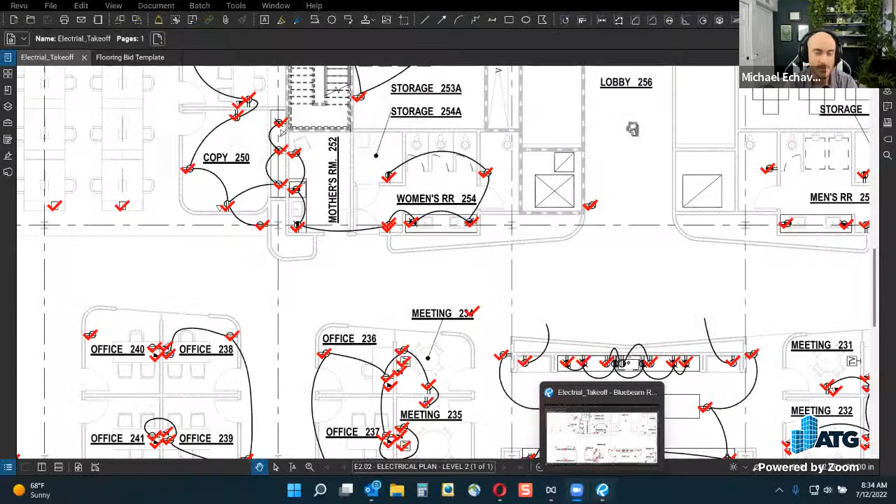We're going to be getting into the markups list and looking at columns, custom columns, and what the heck does that button do, that type of thing. We've done similar things, but I don't know if we've covered this in the same detail. What do you think? I don't know, I'm waiting for you to show me what you have in store, because I forget what I covered last time. I forget what I covered yesterday, so that's nothing new.

In our markups list down at the bottom, we have a number of columns that we can configure, we can change the order of, we can do different things with our status. We can configure these, and there's some confusion that happens where, how come I open up this PDF and my stuff looks like this, but if I open up this other PDF it looks like that? Well, your columns actually follow the PDF and they can follow the profile, there's a little bit of a hierarchy there. Some of these are in a different order when I switch back and forth, some have different names. Why is all of this? Why isn't this consistent every time I open my screen?

Which is funny, because we were just sort of complaining about that. I was complaining that when I open up Zoom, all my windows, attendees, and Q&A panels aren't in the same place every time. So we're tying the room back together here.

So with that, let's take a look at what I've got here. I was sort of looking for a better data set to use this with, but usually it's more fun to do something in the takeoff or quantity markup realm, where you can start adding some custom columns. But in this data set, I've got an electrical plan, I guess.

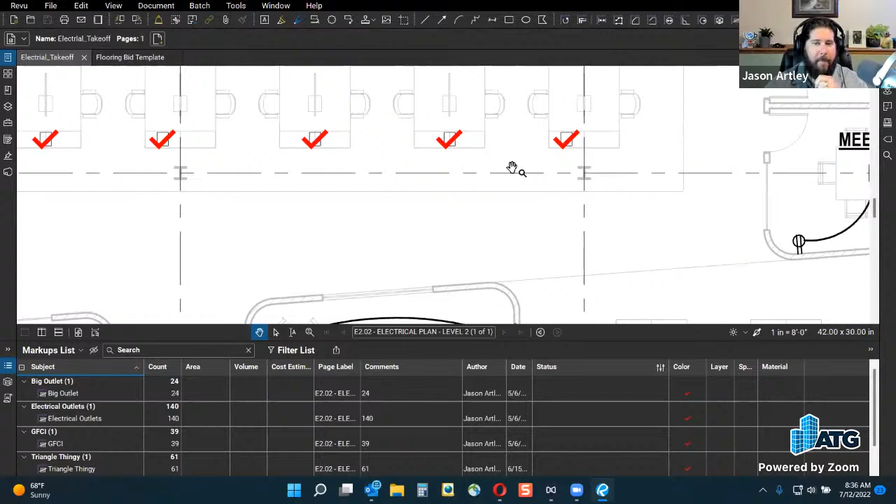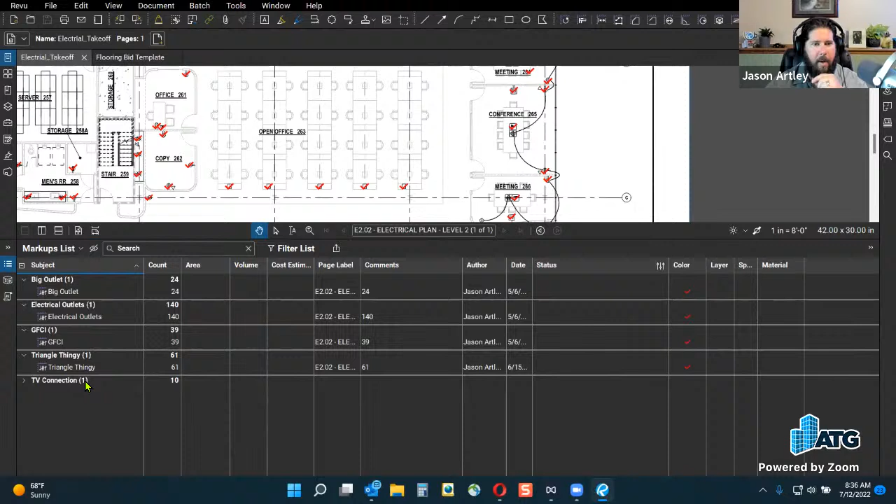I'm not an electrical specialist here, but I ran a visual search for some of these symbols. Here I've got my TV cameras, or TV, I'm guessing, not just a camera. I did a visual search for TVs, and I applied a count measurement to them. Then we see them down here in the markups list. So here I've got 10 TV connections.

So if you haven't seen a visual search, let's run that real quick. I think there's probably something else I can search for in here. I don't think I got it all. Should we try that little triangle thing for these guys? Let's run it.

The only issue with running some of those is the lines, but yeah. Oh, look, there's a TV it didn't find. That's weird. How do you resume the count if you don't find it? Do the data connection. Ooh, like I know what that means.

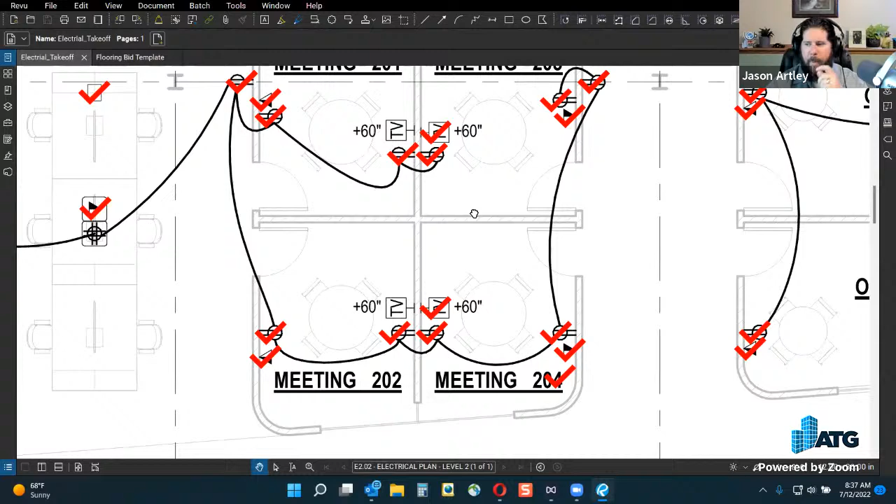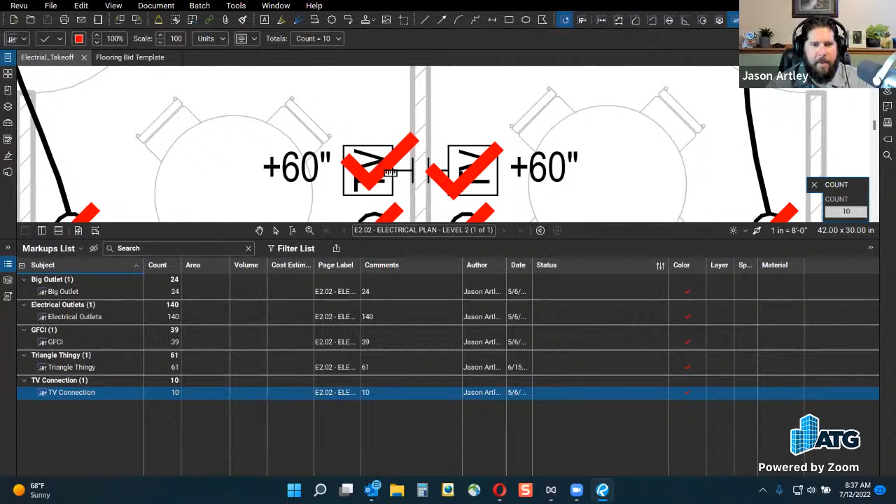Resume the count — got to go down here and then a right click. No. Resume count, now I can go back to my resume count tool. Go find those things again. There's that one. How come it didn't change to 11 yet, though? No. Weird. There you go. But now I can't.

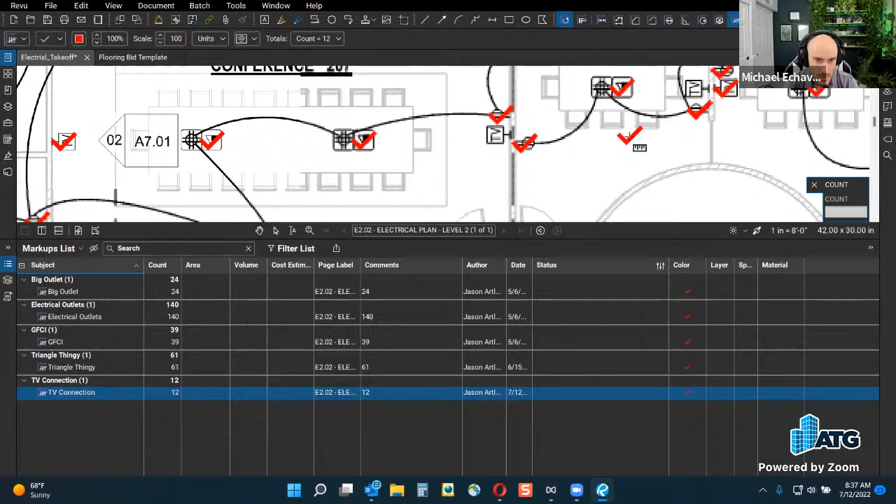Oh, it's a stupid mouse, not Revu. Yeah, you see, you do it one of two ways. You can go from the markups list. I'm assuming the markups list is probably where Jason went, just because they're all the same checks, but different subjects for each check. So resuming a count from an existing one, you just have to make sure you're over the right one before you resume it from a different segment.

Exactly. So in my visual search, it didn't get all of the TVs, it just got most of them. So I did a resume count by right clicking. There are a couple of different ways to do it. And then my mouse periodically loses the ability to scroll — I have to turn it on and off again. So then I got confused, but I think I got them all now.

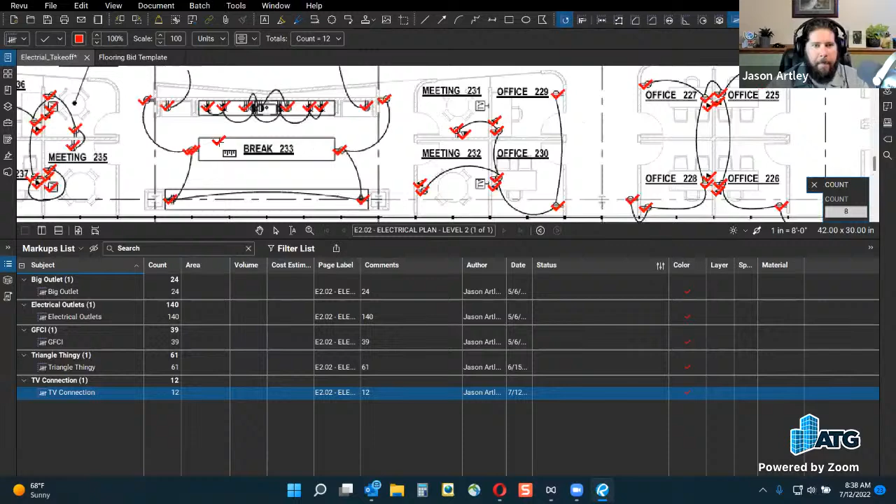Oh, it's like Where's Waldo this morning. And I won't be super accurate at this, but I'll hit enter. Whoa, I never stopped my thing. Why did it give me two different counts? Weird.

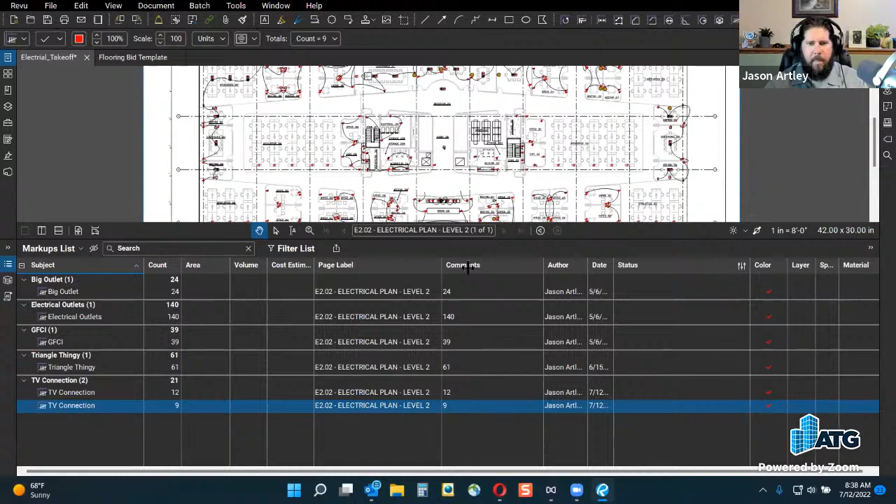So let me know when you want me to field you some questions, Mr. Artley. Never, I'm scared. So here's one — Chris wants to know how you remove one.

That's a fine question. And David's question is even better, because that's what I was trying to figure out. So how do we remove a count? Let me back up. When I did visual search, I went in here. Oh, come here, camera.

Got a rectangle, went around something, and I don't have much that's open. I know this isn't going to work very well, but we'll try it anyway. This is going to be really tough. But you go for a symbol, and then you search. Don't use the current document — search for current page, it'll save you some time.

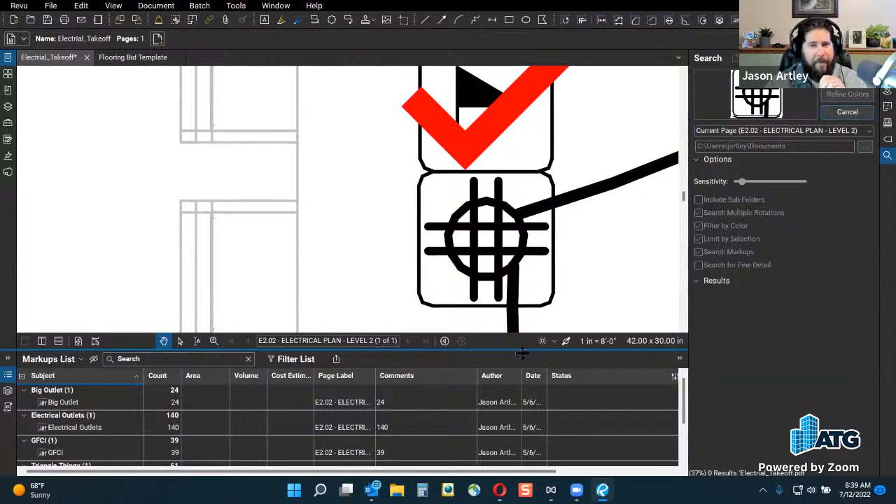But if I search, this might not work out well because of these lines coming off. It's looking for an exact match, and I didn't do a good job grabbing those. So I found 14 of them.

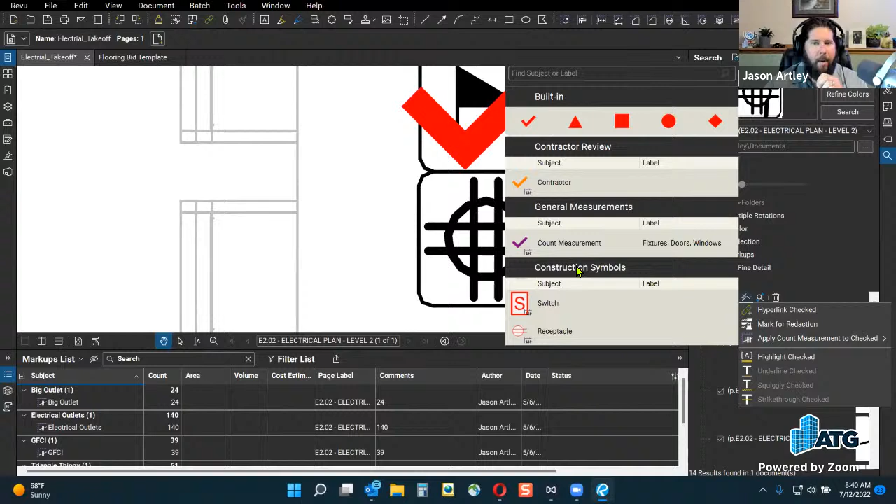So here I can go through and verify them. But if I go up to the top, I can select them all. And then if I pull this down, I have the ability to apply a count measurement. So here I can go in here and grab a check mark, right? Or if I would have done my symbols a little better or customized my markup tool chest, all these would show up here. But I can just apply a check mark, put it on that quad.

Thank you, Sheldon, I totally know what that is — it's a quad outlet thingy, a four banger is what I would call it. So it went and found those. Cool, well, maybe it made a liar out of me.

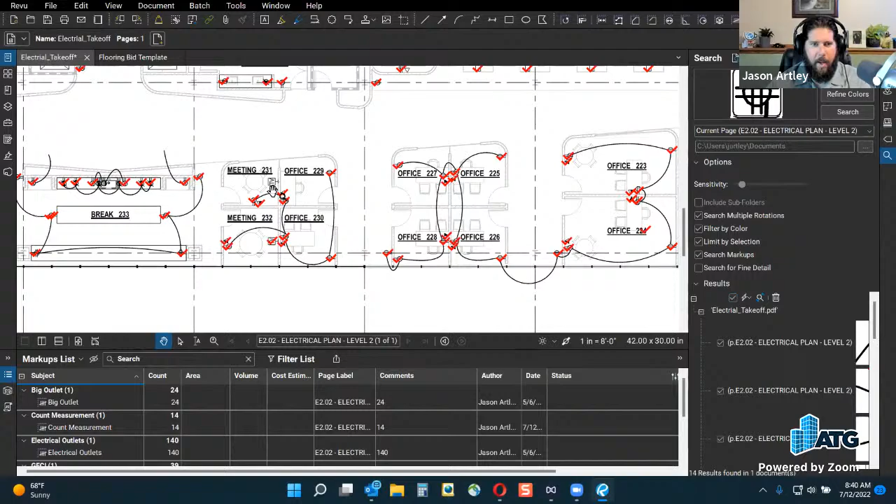Did it get this one over here? No, it did not. But I can dismiss it. It found a handful of them. And down here in my markups list, it's going to say it's a count measurement, right? I didn't tell it that it was a quad. I'm going to do that now because I'm going to just wipe this out and call that a quad outlet. That's what it's going to be. So I have electrical outlets.

I have quad outlets. So couple questions. Is it possible to merge counts? This is what I wanted to do. I did a resume count because I had run the visual search. It didn't find all of them. I right-clicked on the thing down at the bottom.

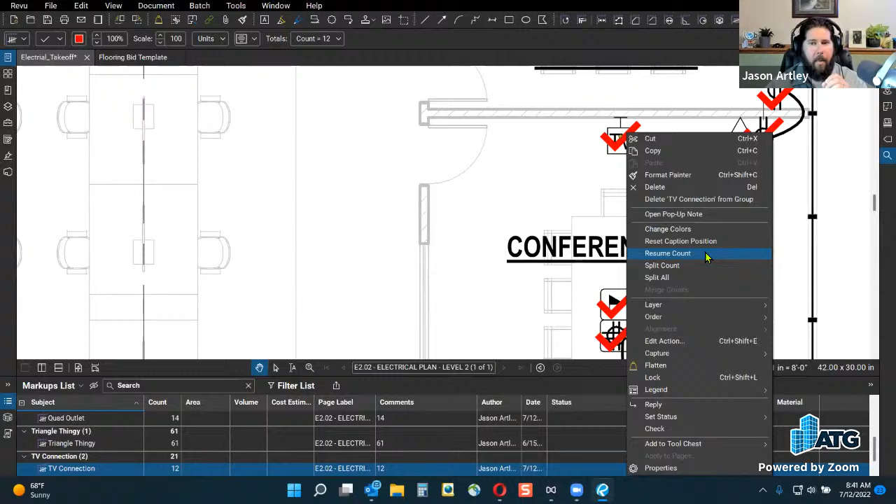I could have right-clicked here on the check mark and done resume count right here. When I did that resume count for my TVs, it actually gave me 2 down here. And I don't fully understand why it gave me 2 different ones. They are merged here because they're included in the totals, but I can't get these together, right? There's no way to.

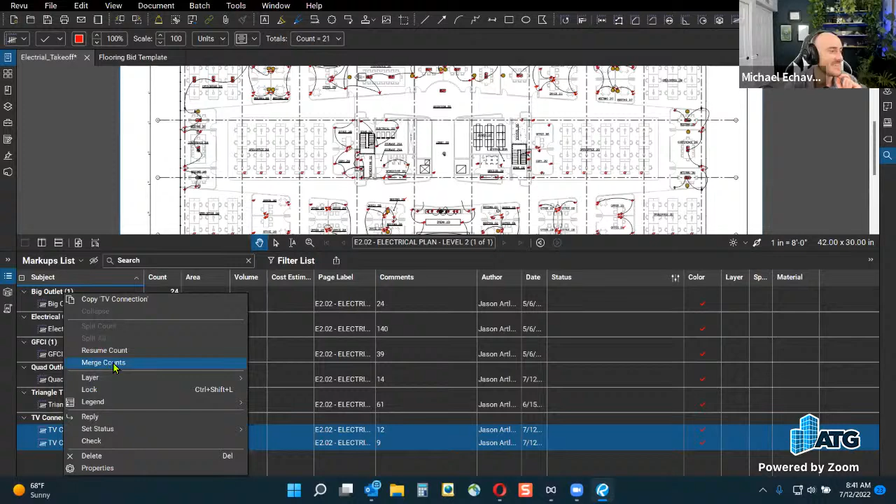There is a way. Yeah. There is a way. Look at that. I was waiting for you to ask. No, David asked that question. And I was like, I wasn't sure. I was waiting for you to ask me how you do it. I thought I'd seen it somewhere, but when in doubt, just start right-clicking on stuff.

So yeah, you can resume counts, you can remove counts. Someone asked a question about using different symbols. It's completely up to you. Just be aware you'll confuse yourself if you don't use a different symbol visually, but your data will all live down in the markups list either way. So if you aren't using a different symbol visually, you may be confused because they all look the same and you don't know what you're counting. In terms of the itemized list below, that's why you have different symbols for different items. Heck, you can even go through and take a symbol, snapshot it, change the color, and then use that as your count if you wanted to, and create it into a count. But yes, you can merge, you can resume, you can remove.

Counts can be per document or per page too. And I thought, didn't we do a whole episode about this? Or we've teased about it a bunch of times, but that merge counts thing, I don't know if I just learned that or if I forgot about it or what, but I'm glad that it worked out for the right click. And I'm glad that somebody hadn't seen that before. So there we go. That's what we're here for. Let's get under the hood and start messing around and learn together. That is all fun. That's why we do what we do.

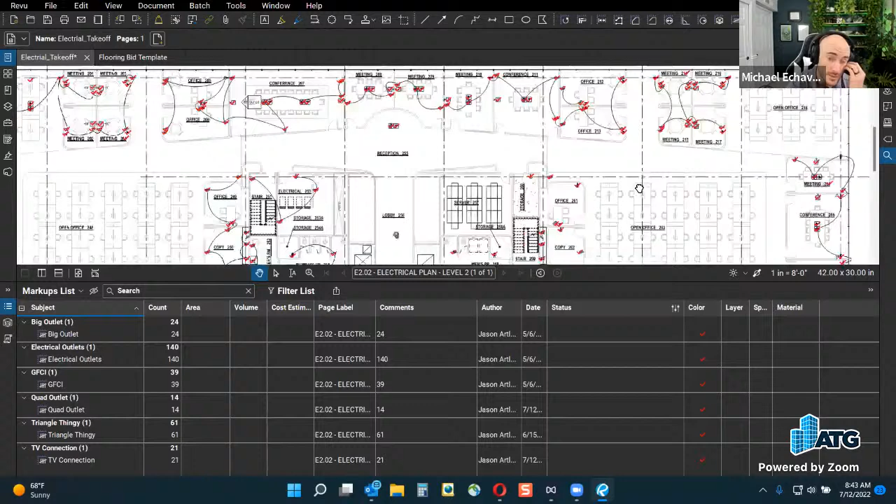All right, so you can get count per spaces. So depending on how you want to itemize your information, you'll create spaces. I forget who did the overall, but I like to do it where you have an overall space because you can have spaces within a space. And this isn't like the movie Inception, but you can have a space, which is your header space, so that you can say what page it's on or what level of the building, right?

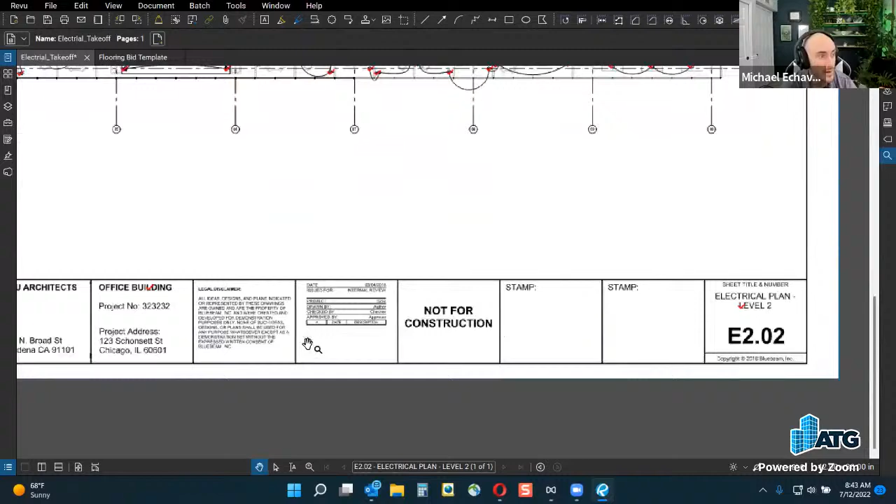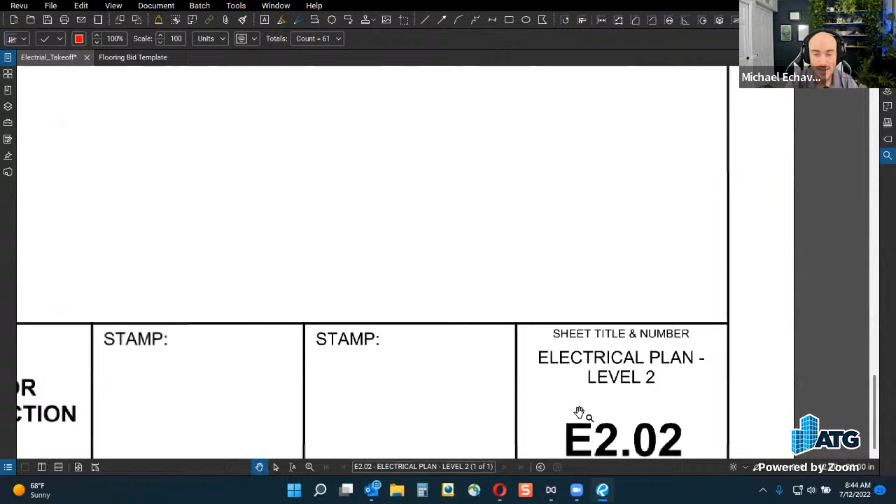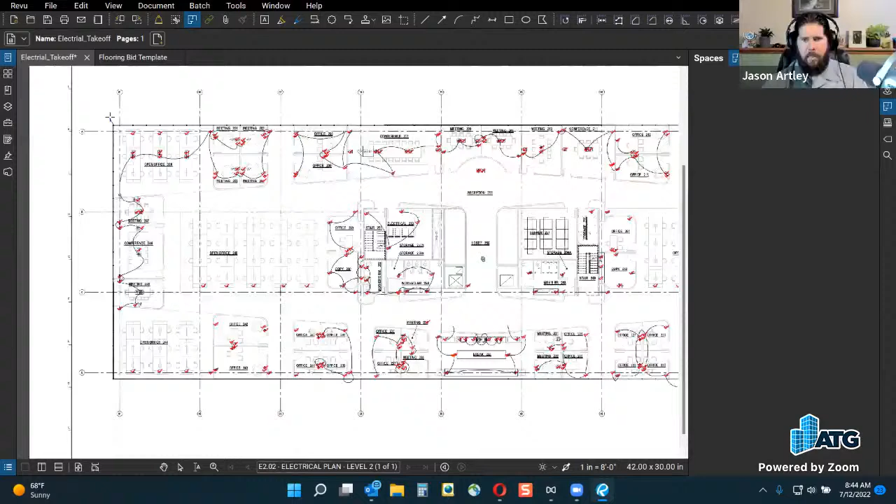Sorry, I just hit my screen. Going through and having a space within a space, because then you have like the level, and then from there you can have the room that it's residing into. All right, oh, I messed that up. I like rectangles, I know. I was trying to get a nice clean rectangle here. So there's my level 2 space. And then Inception, so when another space falls within another space, it picks up that hierarchy of a child space.

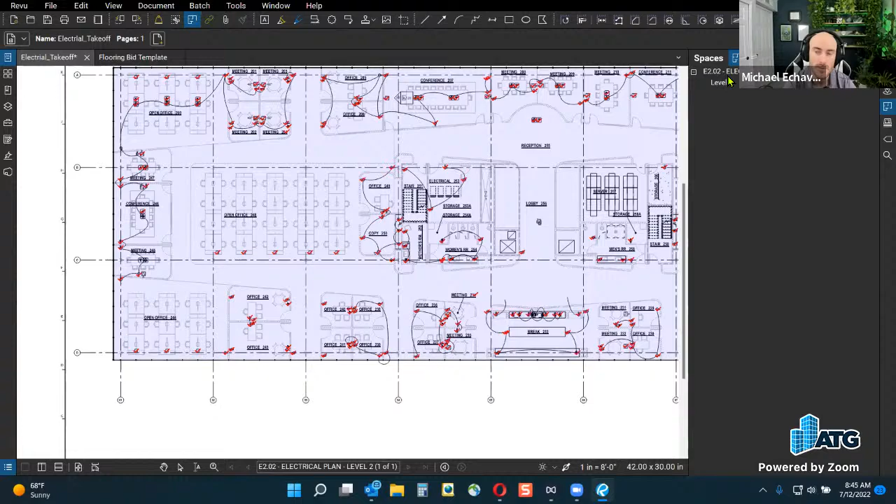So Jason, go and put in the space, man. I'm trying to find an easy one. This room's crazy. If only I had followed your advice on LinkedIn about using dynamic fill to create spaces. Oh boy, thank you, sir.

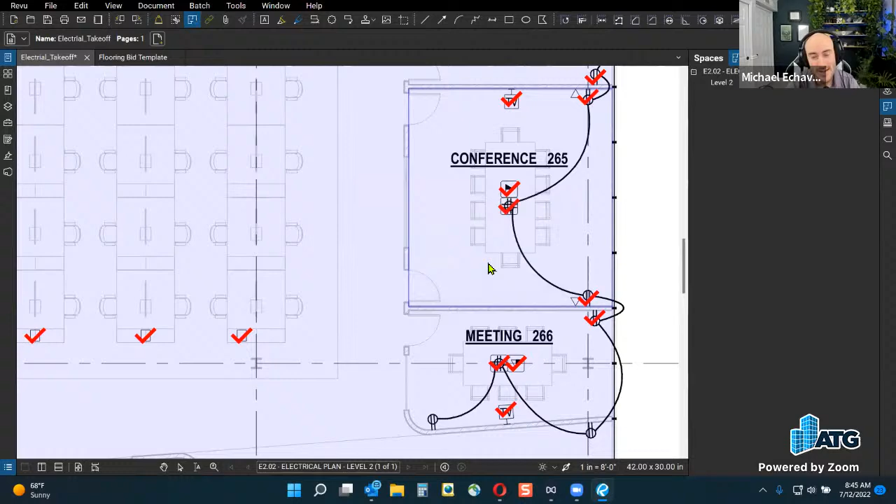So here it is, see, yeah, he has level 2. So it'll say level 2 in the space, and then conference 265. Man, it's early.

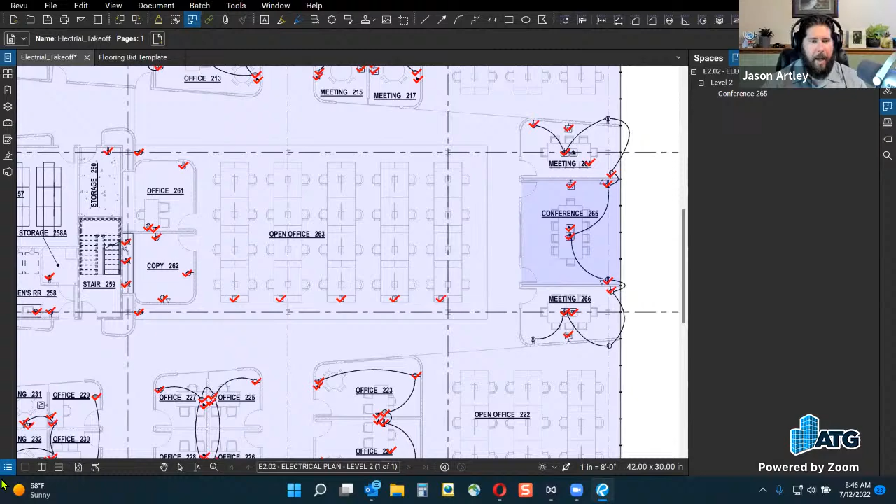Start chugging that coffee. Up here we just see the name of the PDF, so the PDF doesn't always tell you that it's electrical plan level 2. We put a space within a space to tie everything together, because now in the markups list you're going to see a space. Or are you?

Count area. Oh my God, did we just fall back on track? We did, there it is. So here is our space.

Well, I want this over here. Ta-da. How'd you do that though? You just drag, like magic. You click and drag, you take what you want, you put it where you want. It's okay, I don't remember what I did, I just did things.

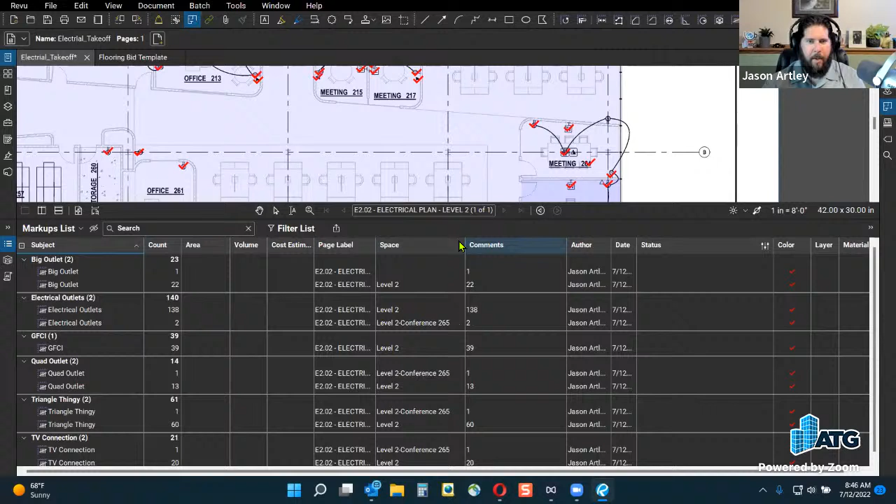Left click and drag, seen that little tiny white triangle right there? Oh there it is, oh it's back over here now. That will drag it to where you want it to go. So if I want to put this over here, follow the little white triangle, and ta-da, it will show before that one.

And then show them if organized from the space too, so it sorts it. I like the breakout there, because then you can see - except for those people in estimating, it's probably going to be magical for you.

I'm thinking more in terms of a punch list. I'm going out to the field to itemize things that need to be addressed, and this can tell me, right? So level 2, conference 265, I have 4 issues - he has 4 counts in there. But you could do this for an itemized list of going through a cost estimating.

Well, what is in that room, right? So now I have triangle thingy, quad outlet, TV connection, and electrical outlets that need to be assigned and purchased for that specific room.

Does that answer your question, David? If you put it in left position, does it sort by space as the first item? Yep, it sure does.

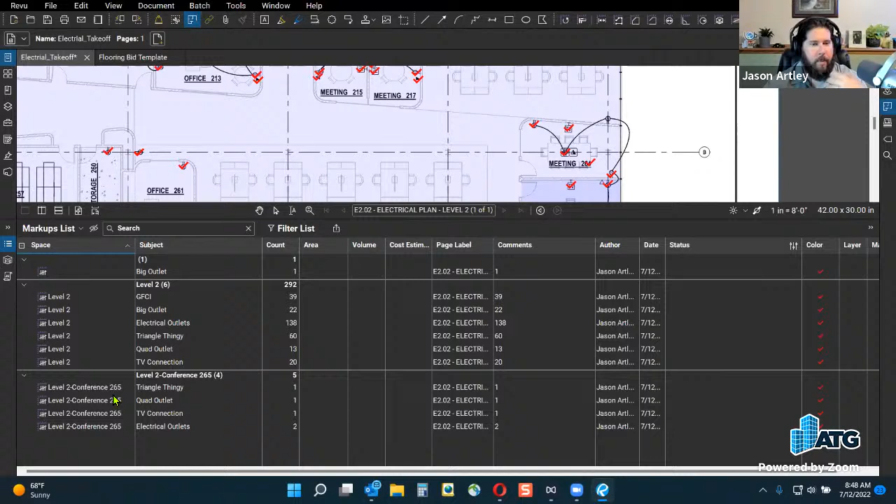This adds a ton of detail and it didn't take that much time to do your spaces. They're so incredibly powerful, because if we were doing a punch list, or having to go fix something, or just hammering down our counts, I know exactly where this is, and being able to get in there and see where these items are, where it is that I need to focus my attention.

And that's just half the things you can do with spaces, right? We can create our snapshots, we can create our areas, we can create details. There's a ton. So always a good time.

Let me go back to the chat. Doug's saying layers with spaces is great - I couldn't agree more, grouping makes a ton of sense.

New find - David had a new find of the good old delete from the group, the single one. The only thing with the single group, just make sure when you're in the group, because you can select from the group. If you select the group, you can pick a new node.

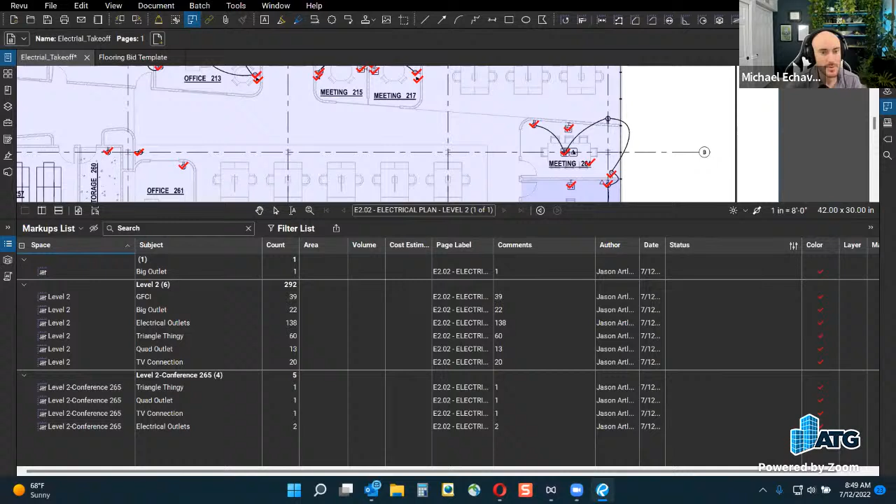So if you go to a count group, Jason, can you go and select a count group - a grouping of counts on the PDF. So just select one of the items in the group.

So you'll see this - hold on, can you move your markups list down so you can see a couple of them? So it grabs all the nodes of that sequence of groups. So grab that thing to the right, because that has 2 right next to each other. And then are those different? There it is, okay, so you can see it down here.

So you see the green node and the yellow node on those markups - that's in the same sequence of groups. So down below on the opposite side, there's a green node. Right where your mouse is, move it up a little bit to the left. I see no green, am I losing my mind?

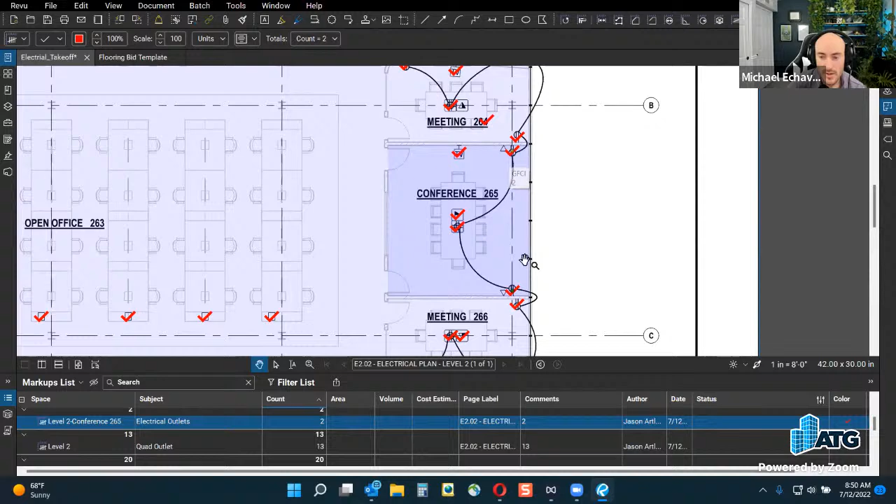Hang on, coffee infusion. So right here, this is green, that's yellow. Oh wow, yeah, whichever one you've selected is going to be deleted. So if there's like 10 here, you'll have 9 green nodes and 1 yellow one, and you can just switch between the 2 - which one is supposed to be deleted - by clicking the node. Does that make sense?

Weird, never seen that before. Yeah, the node is the important one. Just click through which one you meant to have deleted. And then when you right click... sorry, I'm no longer controlling. That was weird, I was trying to get out of your screen.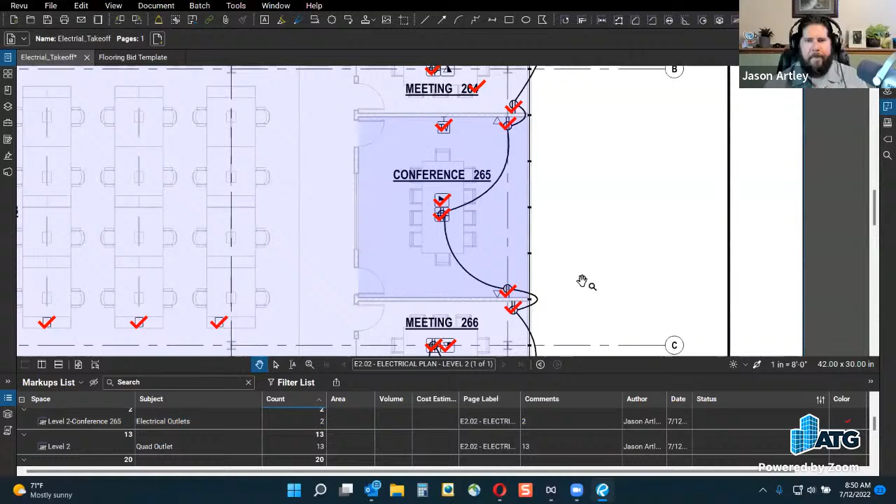Weird, so yeah, my eyes must be failing me. I didn't even see those things. Terrible. What do I need to get for an eye exam on a smaller screen? I just had an eye exam not too long ago.

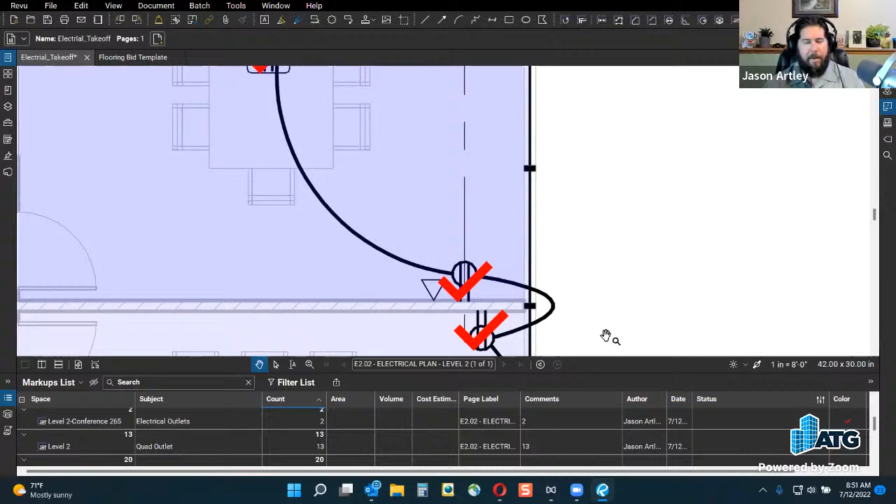All right, let's get back. Can you export the list to Excel? Of course you can. Go to AU or go to XCon, and Doug's going to talk all about that, where you can use your exports, take your summary, kick it over to an XML or a CSV, which opens up in Excel, and then you can do all sorts of things. I highly recommend attending Doug's show for estimating.

Yep, that's the Doug show. Isn't that going to be streamed too? Is there an XCon Anywhere stream part? I don't remember.

There was a question from Ed. Is there a way to, if someone sends them an updated PDF set, yes, you can export. So the question is, can you export markups from one PDF to the next? Yes, you can.

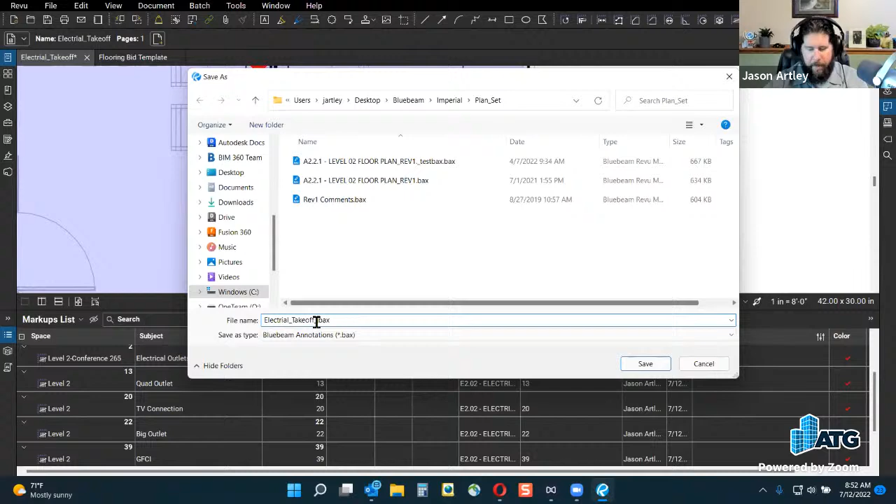So if I export all these markups, this might not be a good example because I don't know if I have a blank version of this, but it's going to export as a BAX file. So I can say, here's my electrical takeoff. If I were smart about it, I would do a date. Now those are exported. Now if I go open up a different file, I think this one can be found somewhere in my Bluebeam plan set.

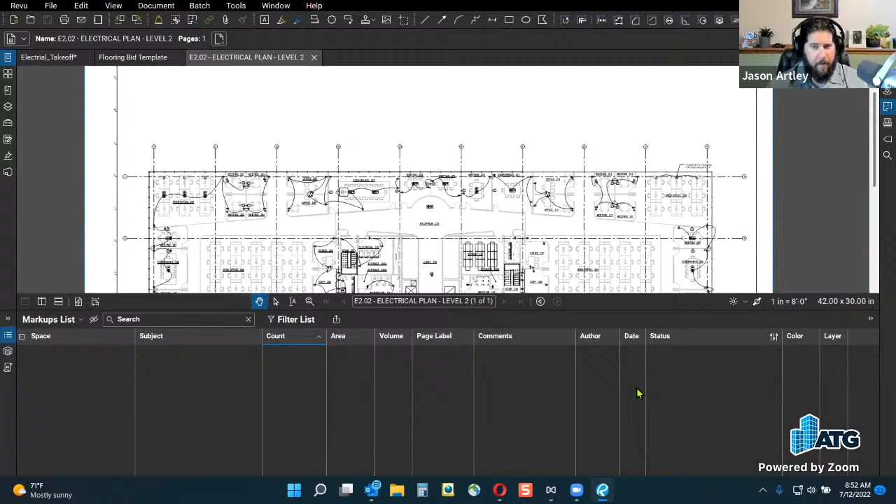Oh, electrical plan? Maybe. Look at that. So here's the raw version of that same file, right? If we go to the markups list, there's nothing there. Notice my columns though, this is what I wanted to show, how they change between the drawings. So these are even different, technically the same file, different names, but the columns are way different. But there's nothing in here.

Now I can go to markups list, markups, import, go find that BAX file. BAX file, that was electrical. What, date modified? Did I not put it in there? Not on desktop, you're on C drive. There you go. Was it on my desktop? Oh, I don't know, I'm confused.

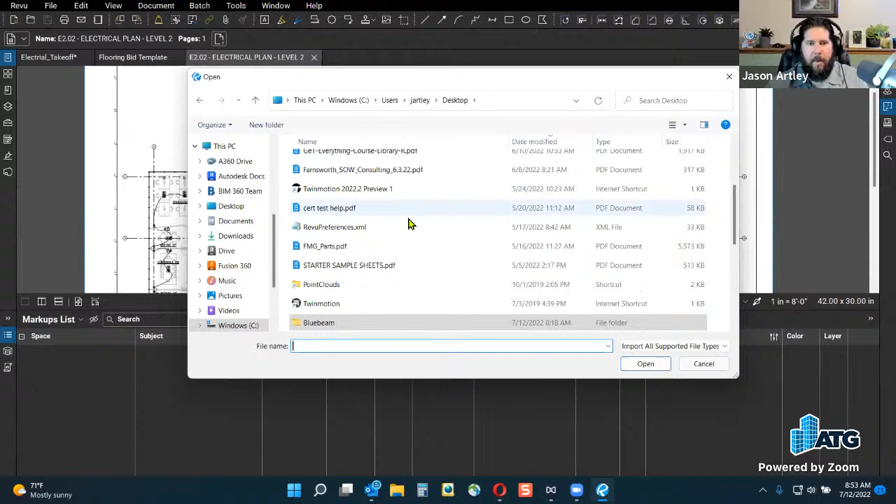It says C drive, but you click desktop. Oh, come on now. It doesn't take long, we'll hit export. I was going to plan set, that's where it was. So, and it doesn't need to be a BAX file either.

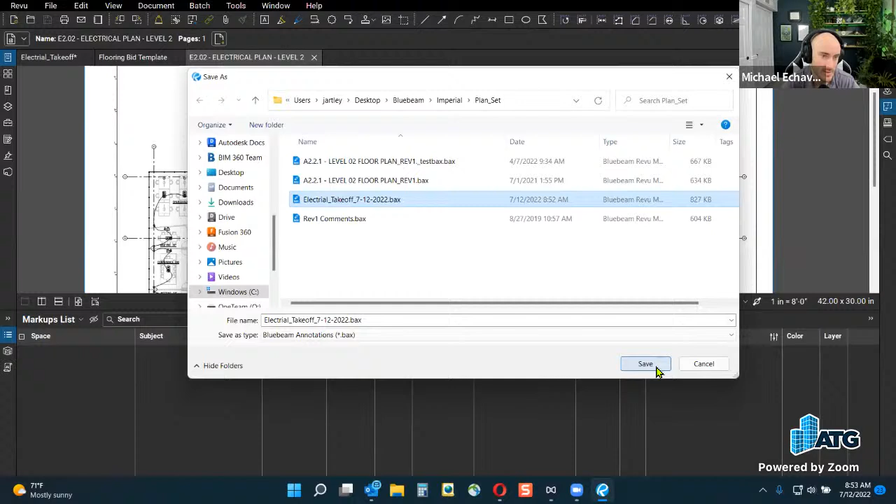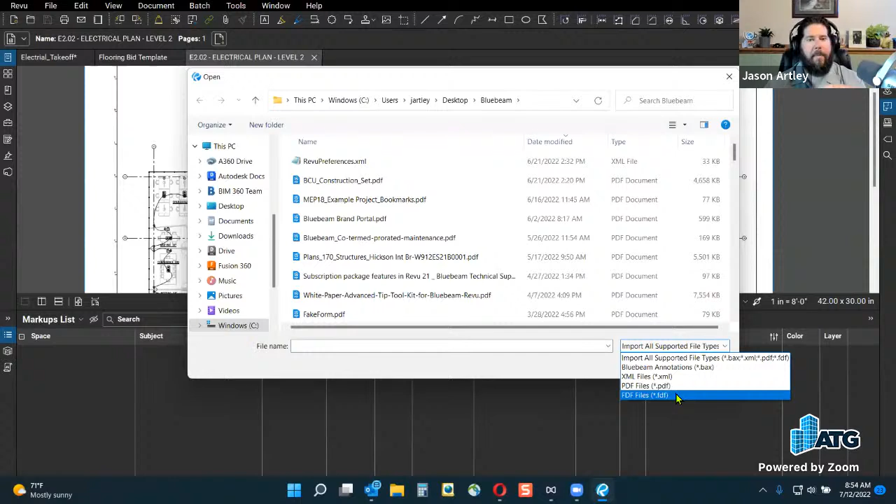For those folks that are looking, you can have either or. This is specifically exporting the markups. You can bring it in from an old PDF set to the next too. Correct, so let's highlight that a little bit more. When you go export your markups, they can be an FDF or a BAX, but when you import your markups, it will allow you to do a PDF, an XML, a BAX, or an FDF. So you could just grab a whole PDF and it will bring in all of those markups. So be careful with that.

FDF, isn't that forms data format? Something like that? Sounds convincing, I don't know. You hit the nail on the head there, maybe? So someone want to Google that real quick? I will, yeah, was that a hint, nod?

So yeah, let me jump over here to my electrical takeoff BAX file that I just exported. Now what's going to happen when I do this? Forms data format, this is where we need like a poll.

It was forms data format? Yeah, look at that. Is that what you guessed? Yeah, I did it. High five, I'm late on that one. I didn't leave you hanging though. But yeah, there we go, so that's your forms data.

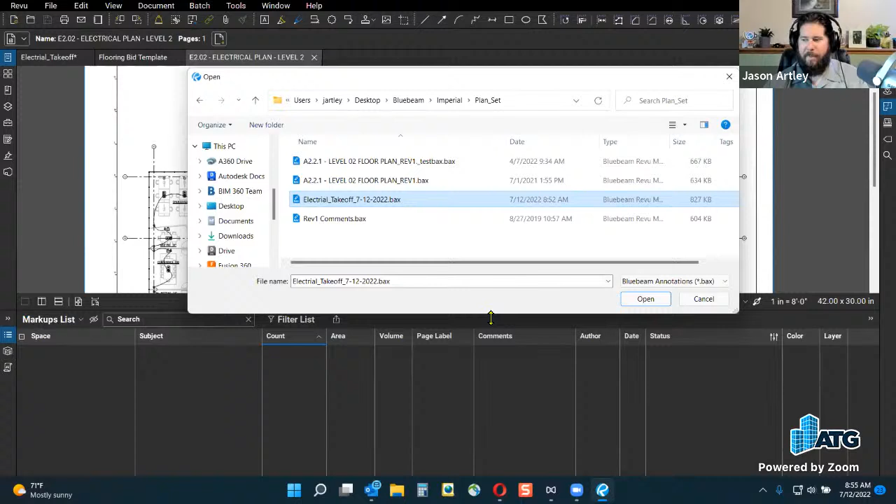So here's the question, what's going to happen to my columns when I import this? Will it bring over the custom columns from that other one, or will it just bring in the count data? Anybody? There's a hand raised. I think Chris just wanted in on the high five. Oh okay, that's what I'm assuming it is. Will it? Oh, inquiring minds want to know.

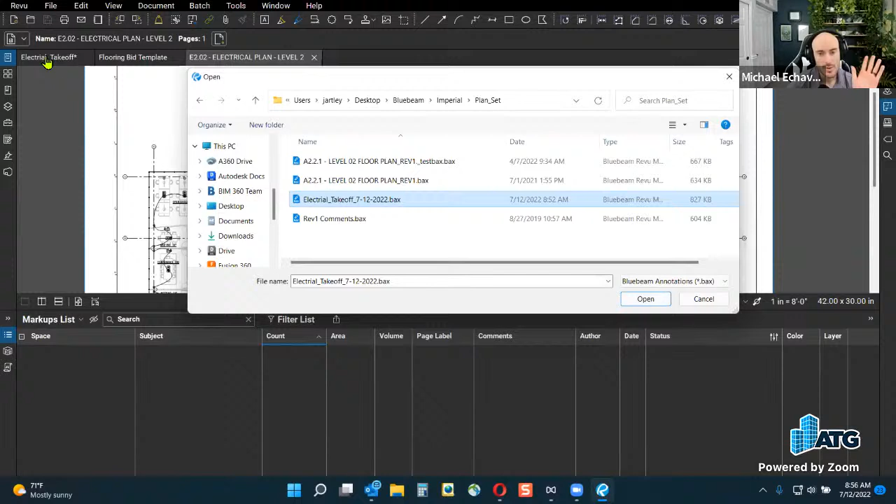Here we go, so subject, count, area, volume, page label. There's nothing in here that's custom. And you're not changing the profile either, right? Nope, all I'm going to do is import the markups from my electrical takeoff drawing. But hold on, what's the difference from doing this versus the standard PDF? So we should rerun it back with exporting and importing from a PDF.

I don't know what the difference would be. Do you know the difference? No, that's why I'm asking. Okay, well that's what we're here to do, boys and girls. This is what we love to do. So let's find out. I'm going to hit open. Watch the columns - they didn't change.

But what about bringing it in from the PDF? Hold on. Yeah, there's no custom columns that came with it. Spaces didn't even come with it. Because custom columns are saved to the PDF or the profile. Correct. So what?

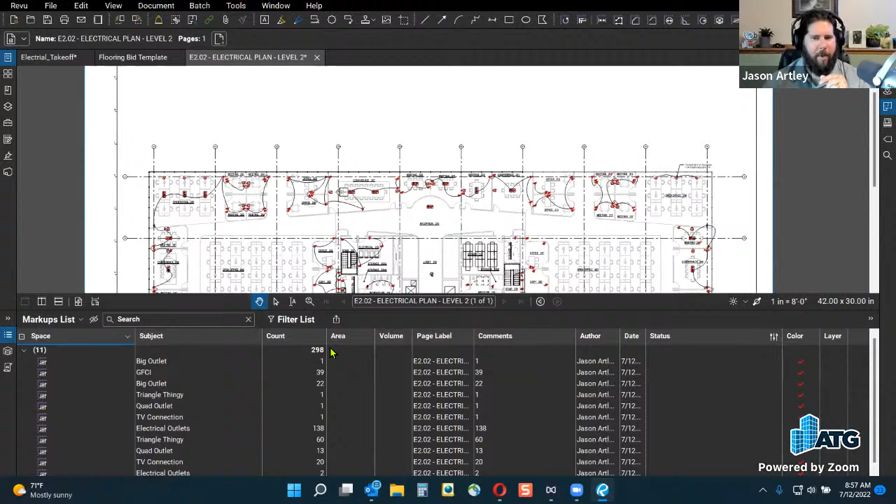So what if you bring it in as a PDF? Yeah, I'm thinking this might be the better workflow because look at this - it's kind of a mess. Nothing is organized the way I like it. I mean, you can do some stuff, but it didn't give me all of the information that I was after.

No custom columns. Okay, let's do the same process where you close this electrical level there. We undid it. I'm going to go back to this one. I'm going to save it. See your desktop? Yeah, we always tell it can be saved because you're missing the asterisk there. Did you save it to your desktop though, or did you overwrite it? I overwrote it. That's fine.

It had problems anyway. Oh man. Well, I'll start over. I ain't scared. All right, but where did I put it is the better question.

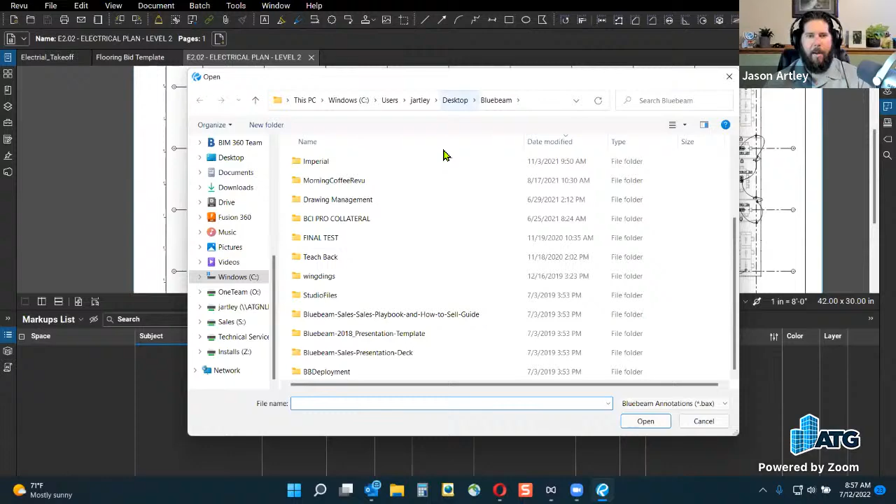Imperial plan set. Oh crap. Uh-oh. What do we do when we don't know where our file is? We come up to the top, we right click. We don't have to hover over that, but we can copy that path. Or we can export that document folder and it will open up, ta-da, right there.

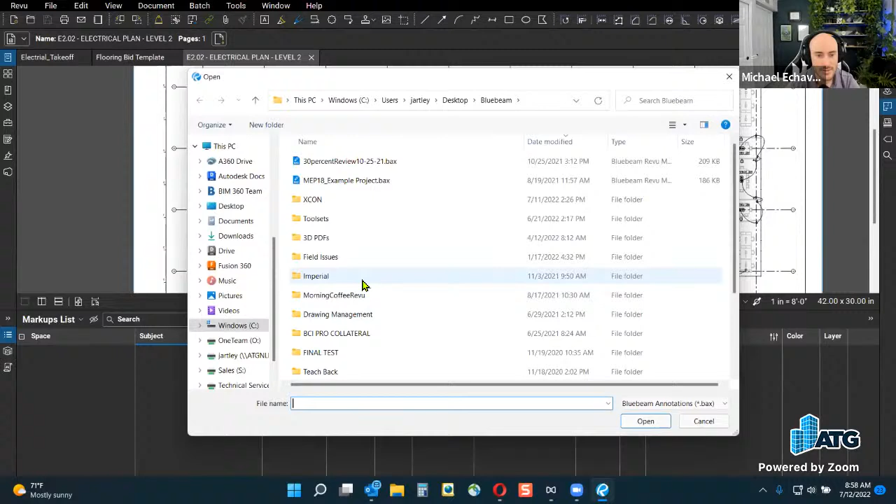So we'll jump back over here. I want to import that entire PDF's markups over here. So we'll go import. Remember where that was? I did until you questioned me. It's looking for a BAX. I'm going to say it's a PDF, and we're going to find it under plan set, electrical takeoff right here.

Save this morning. Now, same thing, same exercise. Watch this, and we'll hit open. Watch what happens to the markups list. Nothing.

Did you have custom columns in that first one? I sure did. Now, it didn't have data tied to it, though. Right? What if it did? What if it did? How would we even do that? So let's dive back in.

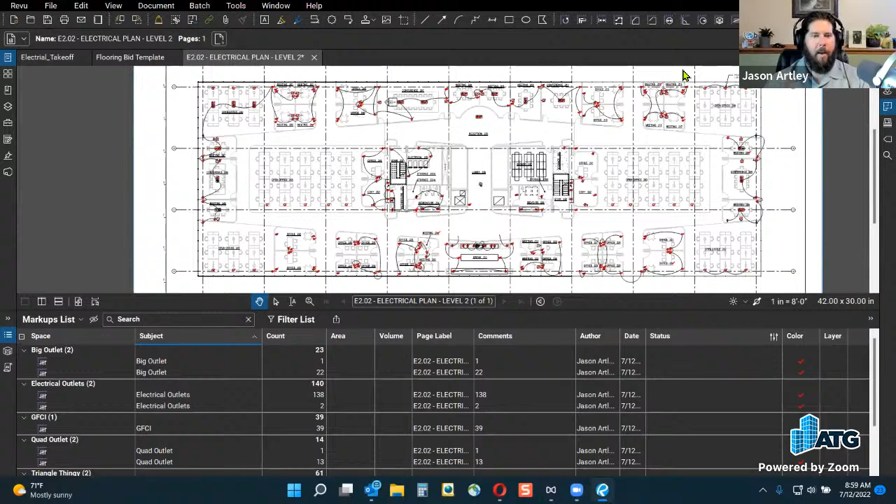Hit undo, back though, because I want to see if it does it. Okay. So let's go back, rewind. Our custom columns, so the cost estimate one that I have here, did not come with these markups. But at the same time, this custom column didn't have data in it. So what we're going to do is add data to this column, which gets us back on track.

If you go to markups list and go to columns, there's a number of columns that may or may not be checked depending on which profile you are in, as well as what PDF you are on. Cost estimate is one that you don't have - that is a custom one. And once it's created a custom, then you can see the check marks. But let's see, page index, we don't care. Lock, we don't care. Check mark, yeah, these are all fine. Length measurement.

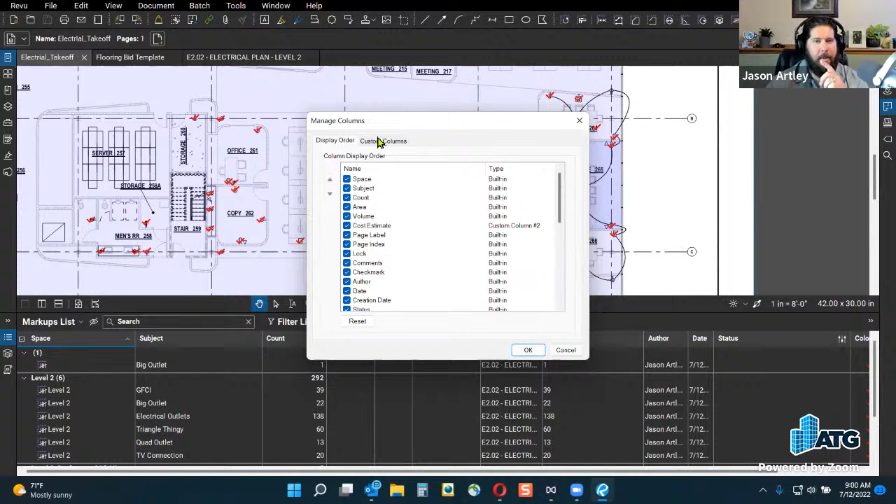Let's go to manage columns. If you go all the way down to the bottom, you'll have your manage columns, and then there's custom columns. You will not see this if you're in a studio session. But in here, I have my custom columns, and I've created one for material, and I've created one for cost estimate. I don't remember what this was, so I'm going to go to modify. Oh, I did area times material. That's not what I want - I want count times material.

Currency, yeah, and the great decimal. The thing about these columns or formulas is that they suggest things, so your variables are existing. Right, makes it easier for you.

Oh, these are... I don't want these. Let's just start over. Material. This really shouldn't be material. It should be object or subject. Symbol, or what's a better name for this?

If I wanted to make one for GFCI and big outlet and electrical, the outlets, electrical fixtures, fittings, electrical utilities... I'm going to go electrical fixtures. Okay, so I'm just going to do a couple of these.

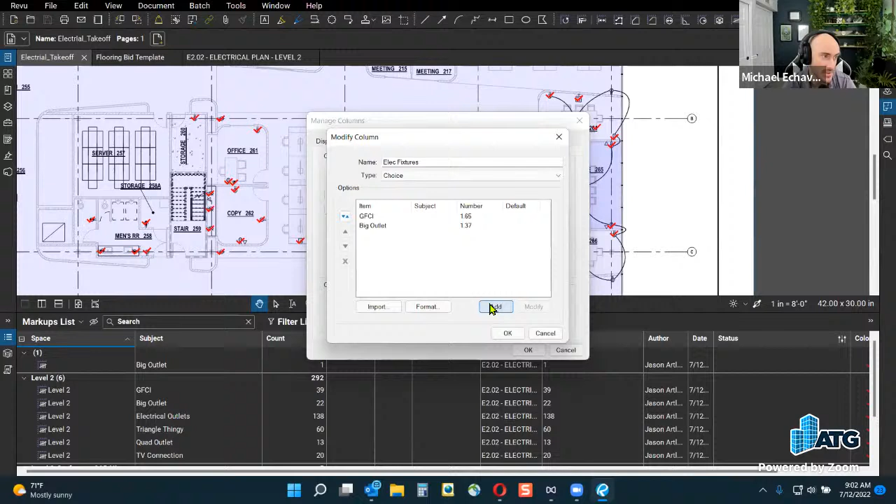And I'm going to say these are $1.65 a piece, randomly guessing. So what you're saying is if the subject is there, I will only have the choice for whatever that subject is. Correct. Can you have multiple subject names in the subject? Because if you want to have multiple choices for multiple subjects, could you do that? I don't know, can you? No, tried that, doesn't work.

Cool, yeah, quad outlet. Yeah, comma... oh, yeah, it's not going to work. But good idea. TV connections. Oh, those are got to be 268. And I'll do one more, just make it quick. Quad.

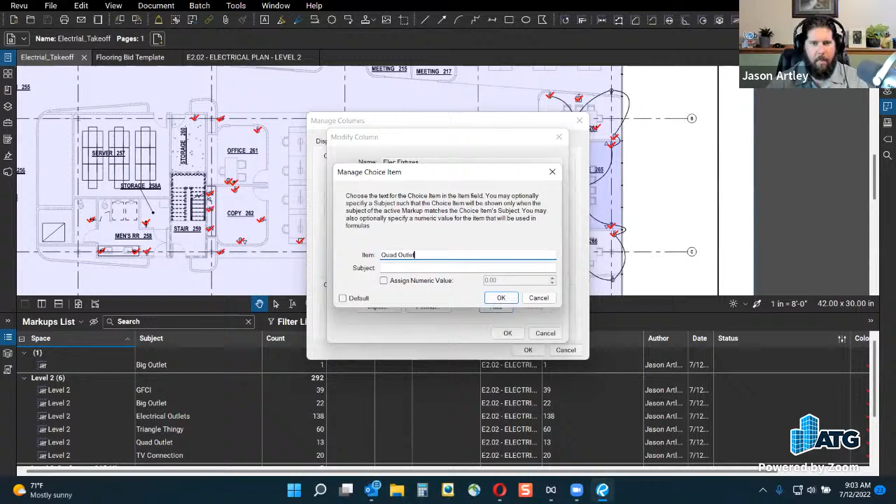These are 3.59 on sale at Menards. All right, so I've added a dollar figure to these, and I've called it electrical fixtures. This still won't work because my cost estimate needs to go back. It's not looking for material, count times electrical fixtures. See, that variable that I just created is now selectable.

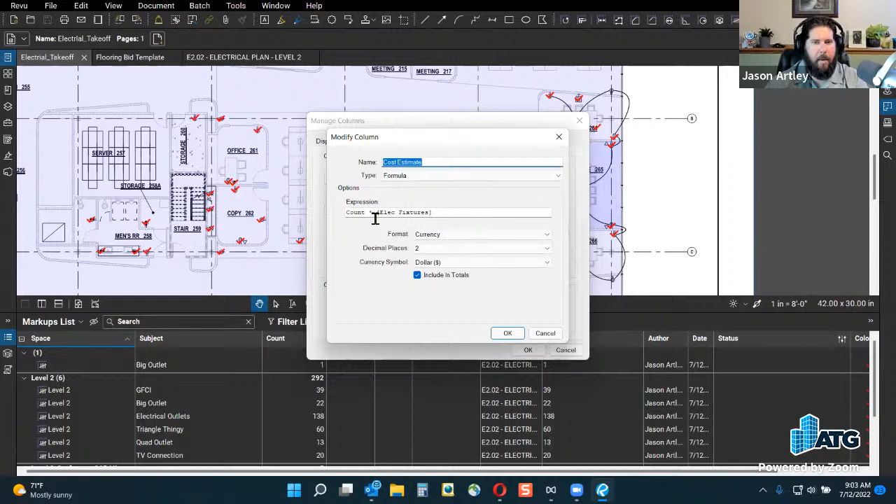So now it will say, oh look, I found 39 GFCIs, and the GFCI has a known cost, right? Because we have it in here of 1.65, and it's going to multiply them for me based upon my asterisk there, right? So we'll hit OK.

And nothing happened. Why? Why did nothing happen there? The cost estimate should have taken in this count. Was it by a choice? Choice? No. So you did a cost estimate. Where'd the cost value go?

It was in electrical fixtures. Oh, did you assign it? I didn't assign it. So I made these, right? But I didn't tell them what this is. It doesn't actually need to be that.

There isn't a column for... where's my electrical fixtures? See, it's all gotta go and find it. Gotta go find it. Aha, there we go.

Seems like I shouldn't need to do this though. Seems like it should pull this in without me having to tell it what it is. Right? You do that. But I'm assuming you're just talking like that because you know you're gonna be able to do it. I kind of did it. Setting yourself up. That way, yeah. Not so great way. But again, I can quad outlet.

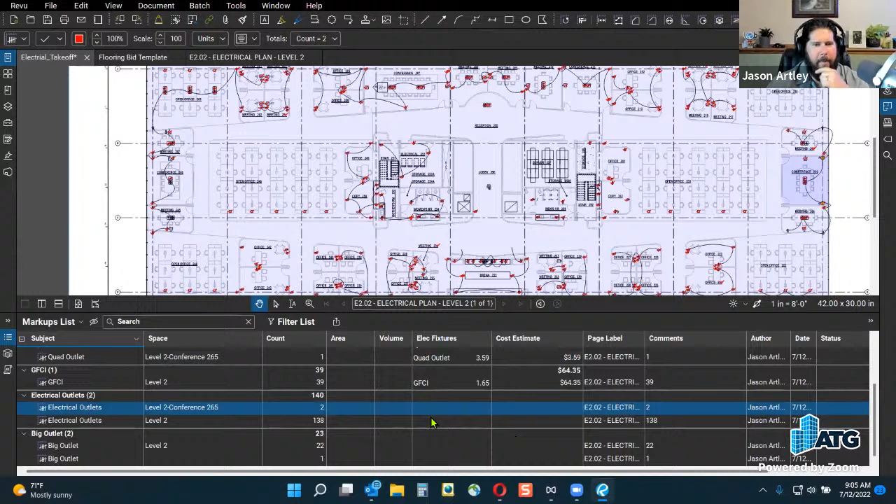We can merge these counts, but I'm going to leave these separate because they're in different areas, right? Electrical outlets, I didn't create one for those. It's not there. Big outlet. I did do. And this would be a great way to not have to, because the other way would be cost and then a total cost column.

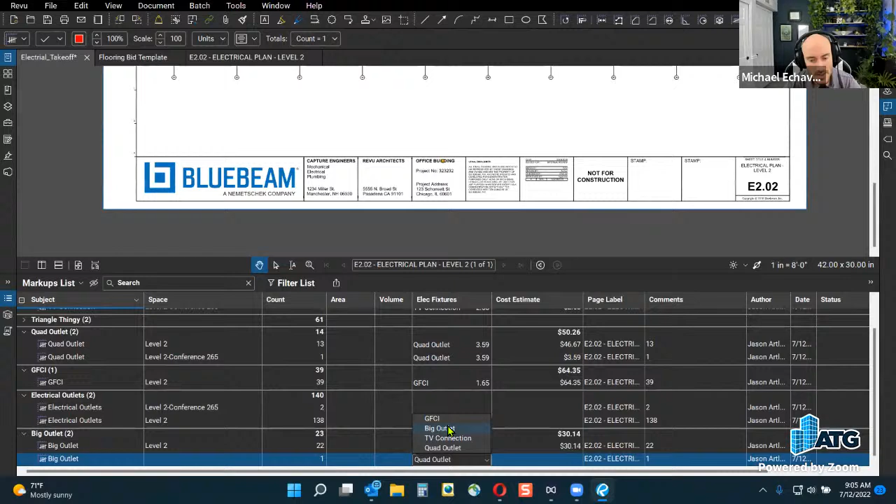The issue with that is you can't have multiple varying in terms of, well, no, it'd be the same because the issue would be a cost total when you couldn't get the same cost total for length and area. You'd have to have a different cost total. Right.

Maybe, and I never thought of this because I just started doing a lot of if-then statements in Revit. You could do an if-then statement: if blank, nothing; if something, show value for this. Because then you could do a cost value for length and area and not have to create two cost totals for each measurement.

Is that confusing? Totally. Okay. You said 'Revit' and just shaking your head. You said Revit and I tuned out. You know how it works.

But in here, what I ended up having to do was I had to tell the TV connection that, hey, you're a TV connection and you have a dollar figure. Doug's asking, can we write the formula so it could be equal to subject? I think we can. Let's go find out. But there's going to be a limitation to this, which we will discover here in just a minute.

So the cost estimate, let's wipe this out. If we told it subject is not an option, so we only have so many variables. So I know that I have a count and I want to multiply times what? If I have to click on any letter, this will tell me what I can do.

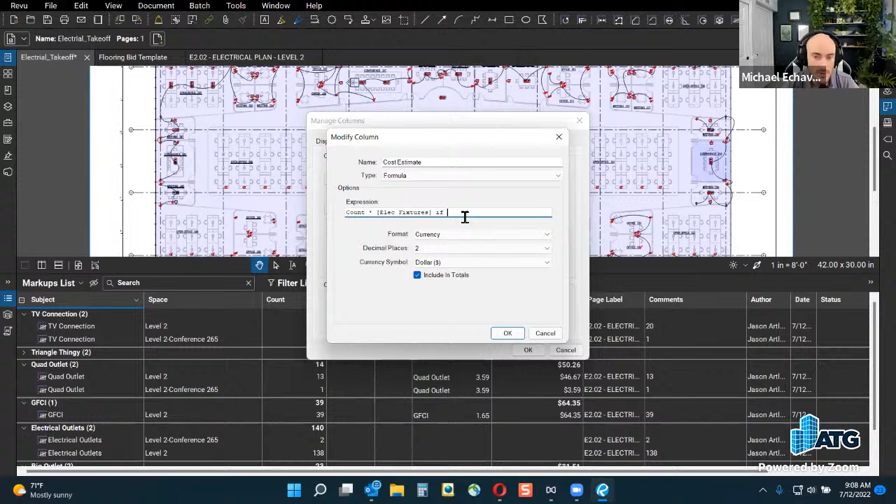Yeah, I'm thinking an if value equals this, then this is what it is. But then if not, then it's 0. That's why I'm thinking I'm going to have to do some expression figuring, maybe I create an expression list for folks because that would be a great idea. The chat is saying that if-then statements do not work in Revu and you can only do one expression per column.

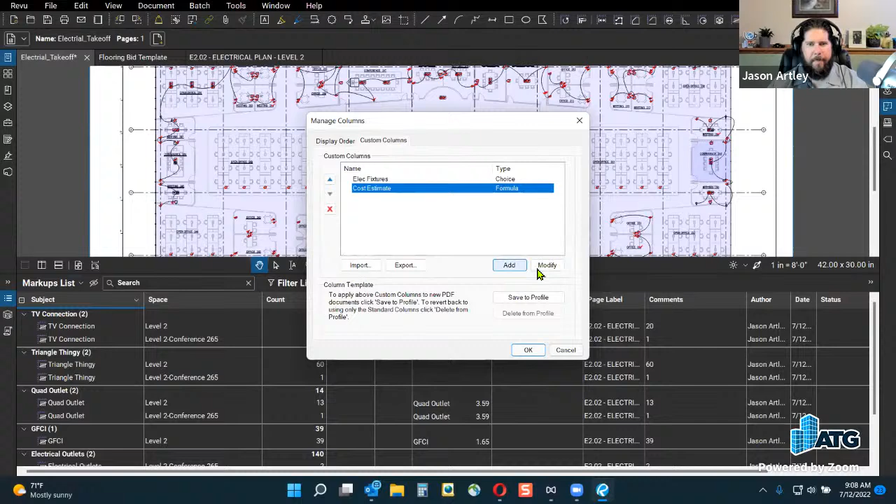I don't know, why wouldn't they let if-then statements work? Yeah, that broke all of them. Oh, you know what? What do we do if we wish Revu did something that it doesn't do? Request a feature, that's right.

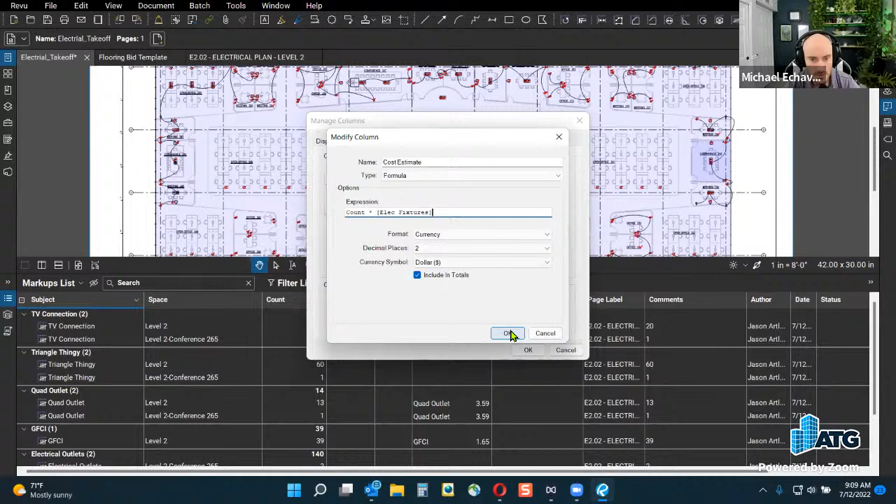Interesting. If you needed to do something crazy like this, if you needed to do something that was a little bit more formula friendly, you could always kick this out to Excel if you have Revu Extreme. Well, that's kind of where my mindset was going, that maybe the point is to do light formula-based items in here, and if you want the full feature, then go to Excel.

So those in Revu Extreme will have the ability to use quantity link, which you will not find here in Revu - you will find it over in Excel land. Will quantity link still be a feature of Revu 21? Somewhere, just in one of the editions, right? It won't be an Extreme, I'll tell you that much. Ooh David, that's not logical. I would agree - can't do if-then statements in Revu. And let's see what else.

I thought I started a spreadsheet in here. That's not where we really want to go today anyway, but just for you, I'll do it. So my Excel, it's like a broken record, I always have to repair my Excel link in my files. So with Microsoft 365, I always have to go and repair it for quantity link to show up. Really? Yeah, weird. Sounds like I should upgrade to Windows 11.

Yeah, I'm going to ignore what you said right there and move on to a question that David asked. Could you provide multiple expressions in the same sequence, area times price plus? Oh, let's go back and try it. That's what we do here.

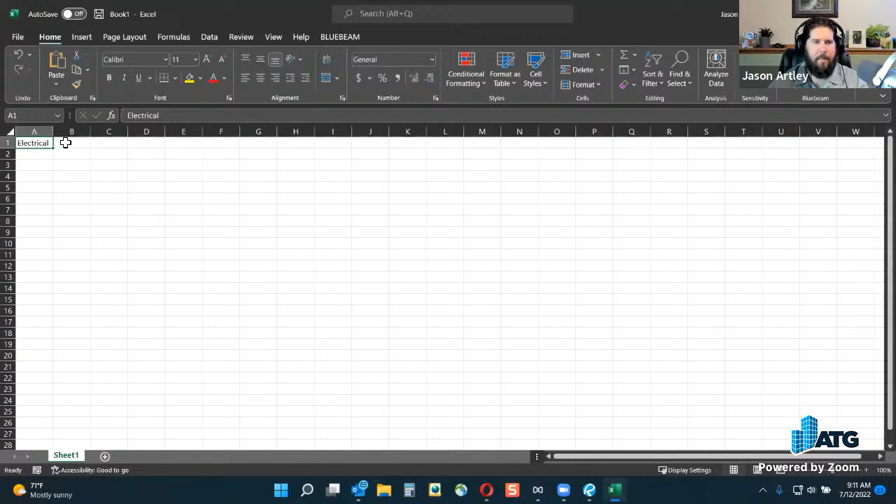But here in Excel, you can go over here, quantity link - if you have Extreme, create, go find that file, go tie to it. It will pull these values right out of Revu, and it will update in real time. Only measurement values though, only measurement values. So there's that, we're done here. I'm having a good day, I don't want to ruin it by getting into Excel. That's Doug's world, I've got to go learn from Doug, and then we're going to find out after XCon what sort of Excel magician I can be. All right, how's that?

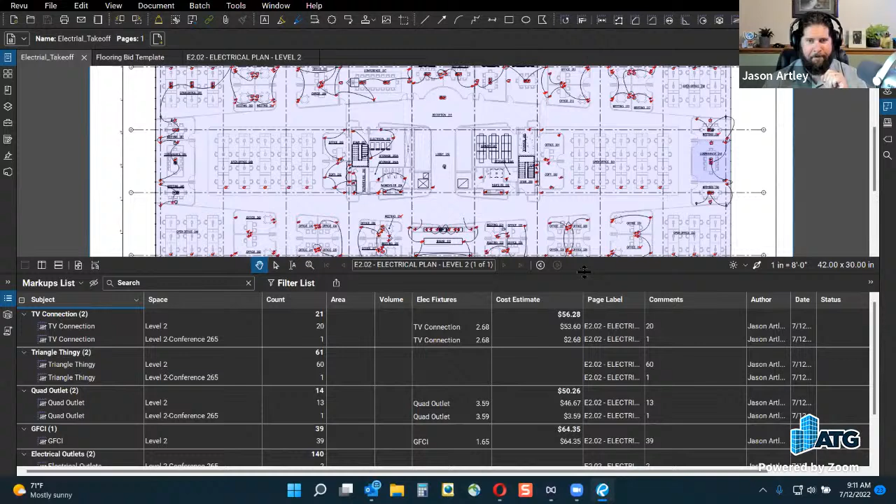So David, custom columns, had a question - can you do that? Bless you. I had a sneeze coming and I didn't have the words to describe that. All right.

So could we do multiple expressions in the same sequence? We can go try this, I don't think it's going to work. But yeah, I think I'm in the same mindset as Vince - Vince thinks that if one of the values is blank, the result is blank. Right, so that's why I was hoping if-then statements would work, which is a complete bummer that they're not enabled for expressions. And maybe that's why, because it's an expression.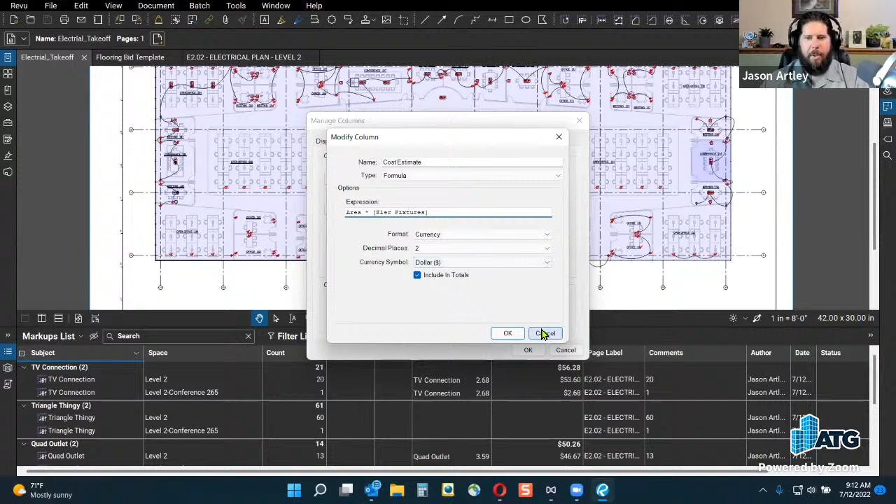And so I can do area, and I can do... I don't have a cost one. Area times electrical - that doesn't work. All right, let's cheat the system here. This one, I've done this same exercise for areas and materials, so this will work the same, different file. So my formula here is area times material, and then we're saying plus length.

Times material. Something like that. So if I had a length of concrete, let's say, for example, will these be blanked out? Because I think that's what Vince is going to say. You guys got a side bet going?

Moment of truth. Oh, okay. Hold up, we need a length measurement. Okay, there's my length measurement. That material, since my length material does not have a subject, I can assign this to anything. No cost, I'm assuming the other one worked because they were already there first. Well, there's no cost value assigned to polished concrete.

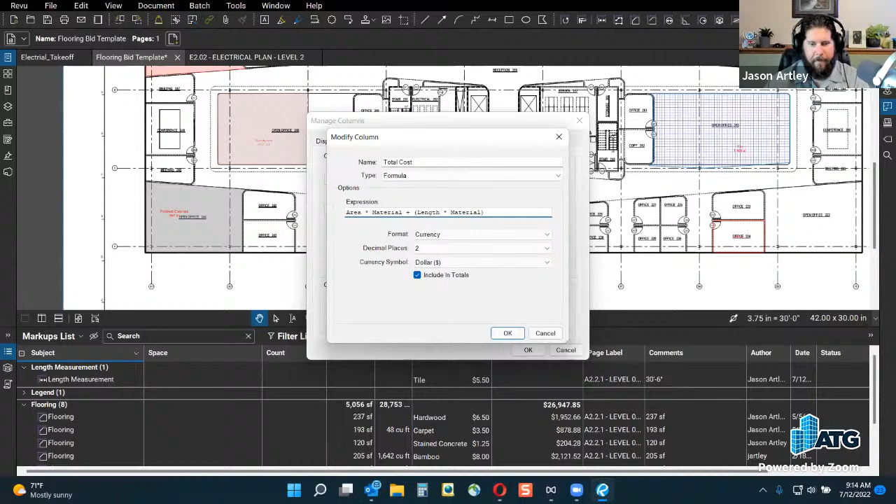Hold on, there's something different. Okay, David thinks we need some parentheses here. Could be, parenthesize, let's see it. Something like that. Or does it use these, or does it use the other type of brackets? You're going to need brackets overall too, probably. Yeah, one step at a time.

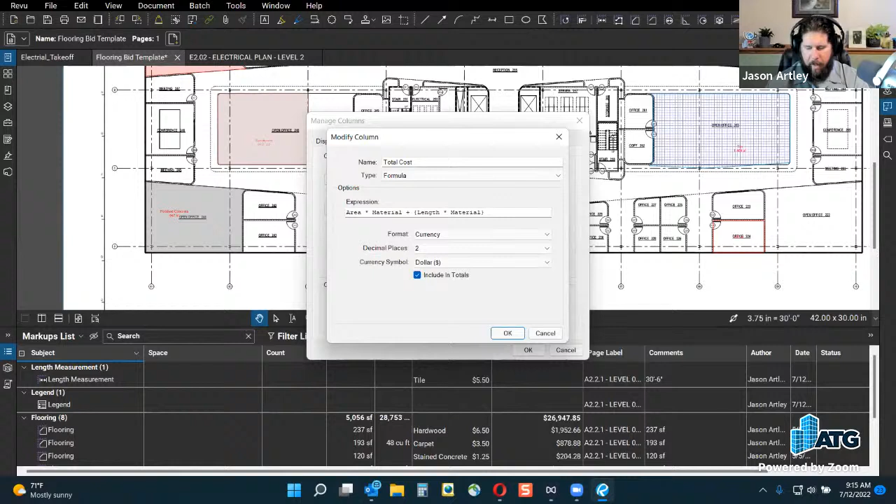Okay, nothing, okay. Oh, they wanted to do brackets. It probably doesn't want a long string of items for it, right? Yeah, wasn't it this type of bracket? No, it's the squiggle ones. Bracket, no. Oh, it's those.

This is what we do. We experiment. We learn. Learning is fun.

Area times material, what do you mean? That works fine without brackets. I'm saying a bracket overall, but the brackets were removed anyways. So I'm assuming that it won't allow you to do long formula based expressions.

Poly length measurement, material, tile, nothing. But yeah, I guess it still shows length. It doesn't matter, yeah, it's still the same one. You're good.

But I have no area. This is true. But I have length, right? So length, it should be multiplying length times that. Yeah, and just like Vince is saying, since one's blank, it's going to always show up blank. Right, coming back full circle.

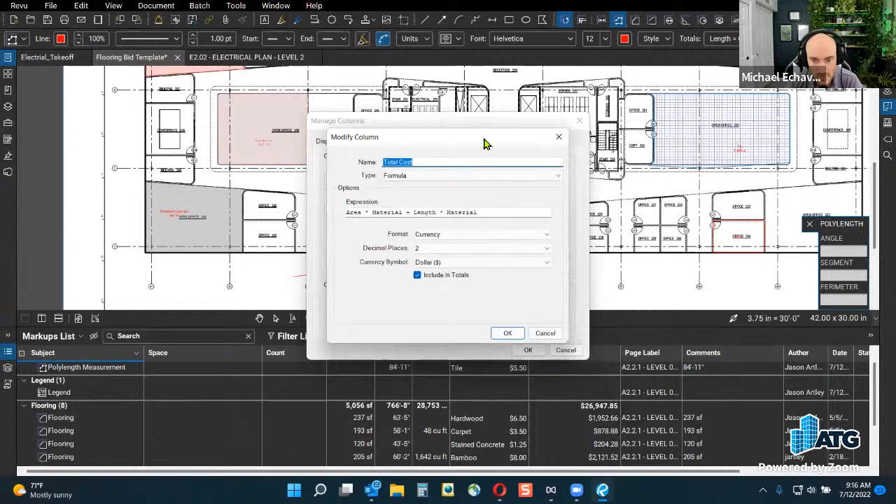As I'm sure all of us have found out, you can't do multiple ones, unfortunately. That's why I was saying it would be great if you could do if-then statements, because currently right now, you'd have to create a total cost per whatever type of measurement feature you wanted, right? Exactly, yeah, so...

Okay, wait a minute, hold on. We might have to make a different one. I should have copied that. Hang on. Add a new one: linear cost. Man.

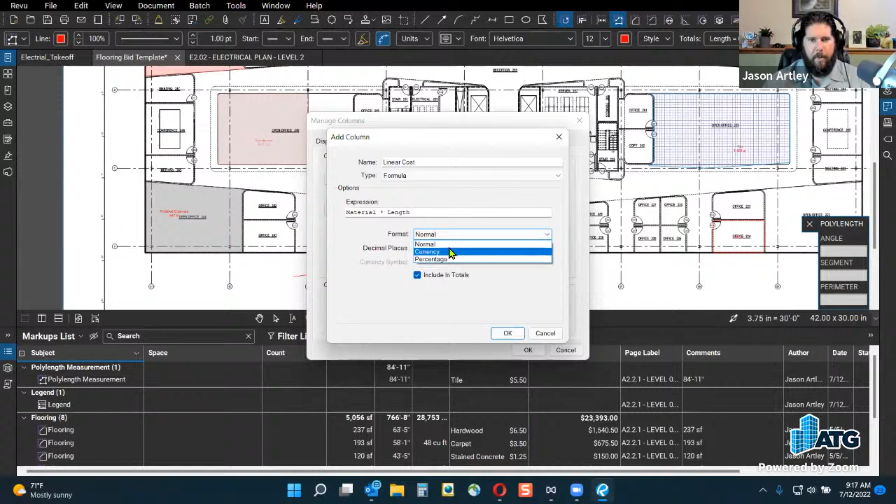Linear cost. Formula, material, times length. Currency, to boom, boom. Oh, it's over here. So here, I wonder if we could do one that would take - we have an area cost, linear cost, and then add those together for total cost.

See what I'm saying? I wonder - I see what you're saying, but that's again coming down to it being two separate ones. And that's kind of one of those things where, is Revu going in that direction where it wants to use the power of the markups list more than single expression lists, I guess.

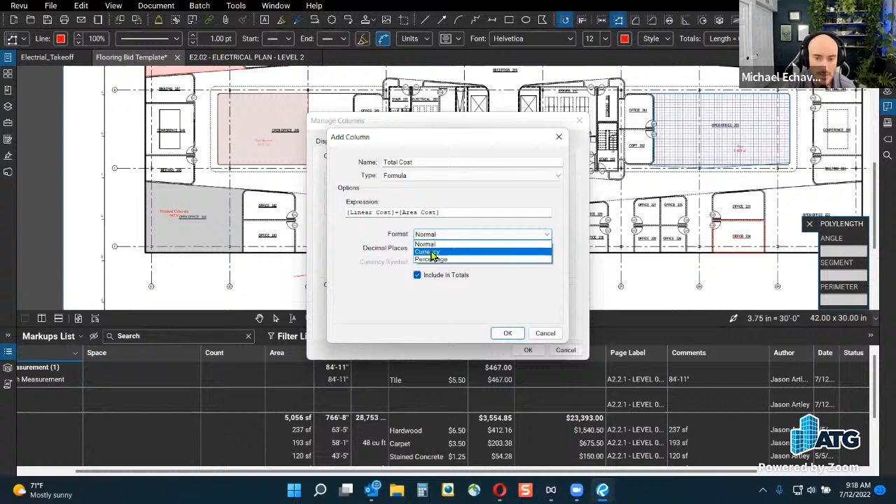We'll find out in the future when Revu 21 is released, see if there's any updates to these options. Or is it just meant to, you know, if we are power users using Excel or Power Query or things like in that realm, to export our data out?

I mean, there's a lot of people doing some amazing things with this software when it comes to estimating, and I'm sure that they're kind of laughing at me struggling through these similar, basic formulas. But I think you're on the right track. It's got to allow more robust formulas in here to keep people in this software and not go over to Excel.

Yeah, right? Not go over to anything else, I would hope, right? And how much on the back end for the dev team would it be to update it to multi-list expressions and Boolean values?

So it's a little silly that what we came up with is, because some objects have a linear cost, some have an area cost, and then I just created a formula that adds those two together, right? But you're not always going to see those together.

So here I have them, they're added, but there shouldn't be a linear cost here. Yeah, because there is a length, because length times width is area, right? And it's taking that value here. This cost estimate is no good. Yep, and this is the issue I've had with another client where I did the same workflow. What we had to do is create a custom export, so it just doesn't show that column for that specific markup, which is unfortunate.

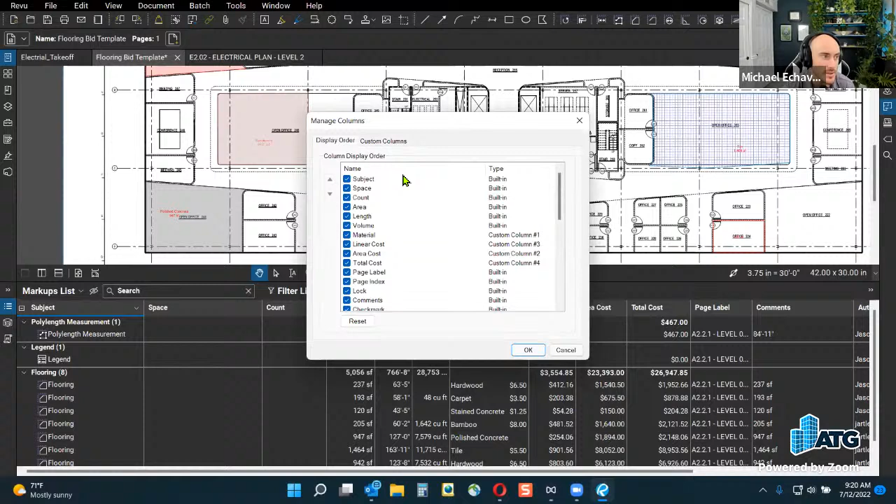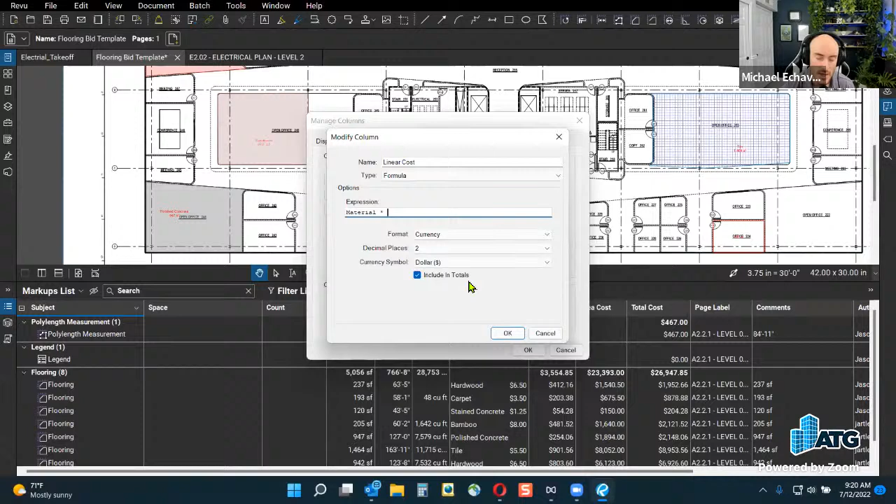So coming back full circle, that's the same issue that arose, and that's why I was hoping if-then statements would work, because then you can say if no value, or if value, don't show X. But that ability to manipulate things is definitely further down the road of what maybe some folks have ever seen the capabilities of Revu offer.

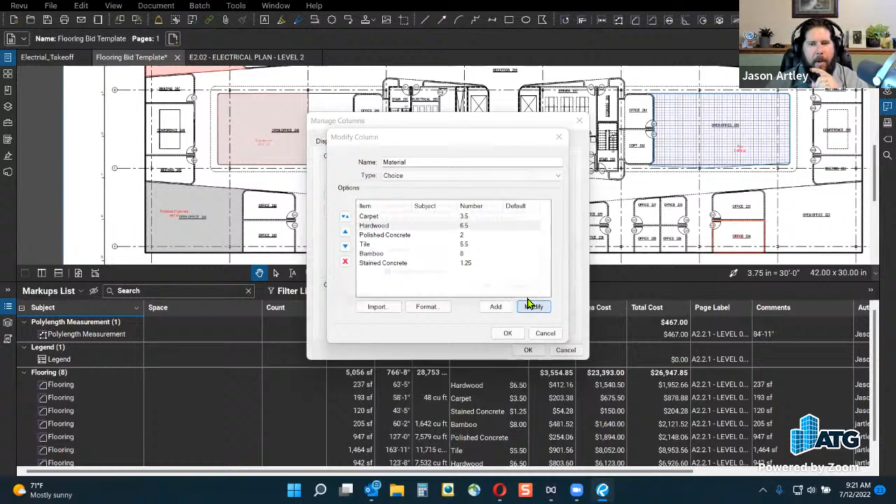I could totally see that, the wheels are turning a little bit. Remember how we neglected the subject here? I can make this match polylength measurement. I can make that be something that would separate these lengths from the actual length measurements. So that can be done. It's more than we want to get into right now, but you can get in here and do crazy things.

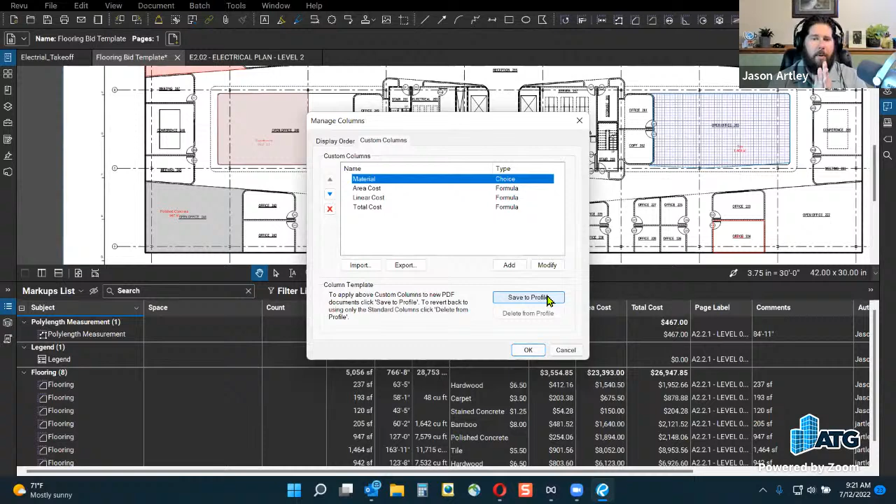And then, as you've seen before, you can export this to Excel, either raw if you don't have Extreme, or if you do have Extreme, you can take some of this data over to Quantity Link. And that's where you'll see folks like Doug talking about power queries and Excel and all sorts of things at XCon coming up in August.

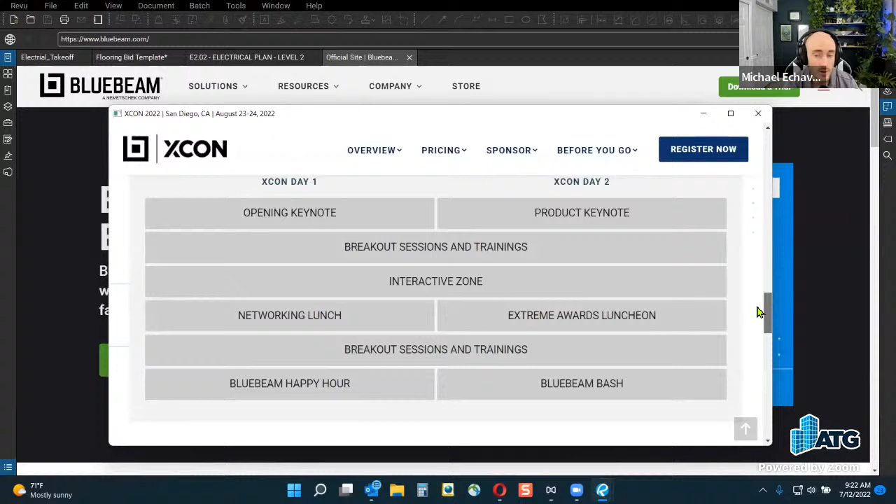Like Vince said, there are a lot of other great things from Excel you'd want to use. I don't disagree - getting more into Excel and learning its power, the possibilities are significant to make the leap and start learning Excel. By the way, if any of you are partners with us here at ATG, we offer global e-training, and that's part of the free training you get just for purchasing your software through us and becoming partners with ATG. So if you want to learn more about Excel, not just at XCon with Doug, you can also get access to global e-training, which has Excel training in it, and it's pretty good.

Hey, that's my boat right there. This is where Jason and I are arriving on the boat, right? Yeah, we're going to meet up in Cancun. Let's get a boat. We'll just meet in Cancun and then take a boat, that'll be our thing. We'll do our MCR from a yacht. Let's do it.

So that's where we'll be. If you have any interest in going to that miserable looking place, these dates coming up, there's going to be some fun things going on here. Lots of good classes - some of these classes are pretty darn impressive.

Where's it at? So you can build your agenda. There's all sorts of stuff in here, some clever titles. Look at that. Look at this one right here. Look at that, Doug, there's Doug. Look at that - business transformation.

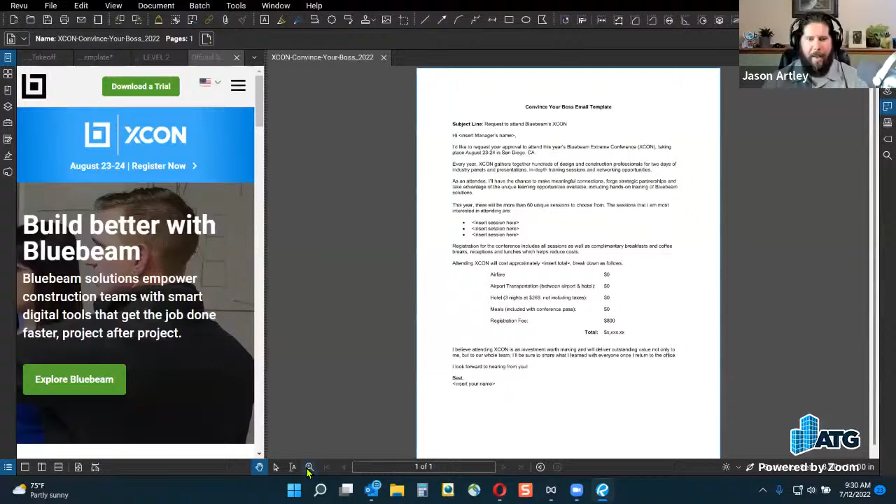They have a convince your boss template on the pricing page. AU used to do this and it was awesome. Oh, look at this, no way. Good call, David. So as we wrap up, this will be our final note: download this template, it even opens up in the PDF. 'Dear whomever, please let me go to XCon.' Has nothing to do with happy hours and free coffees. Look at that, it's perfect. Doug's session, our session, and then pick one other one, that's all you need to do. Just absolutely brilliant. So, airfare, alright, I'm going to go down that rabbit hole. We've got lots of rabbit holes to go down.